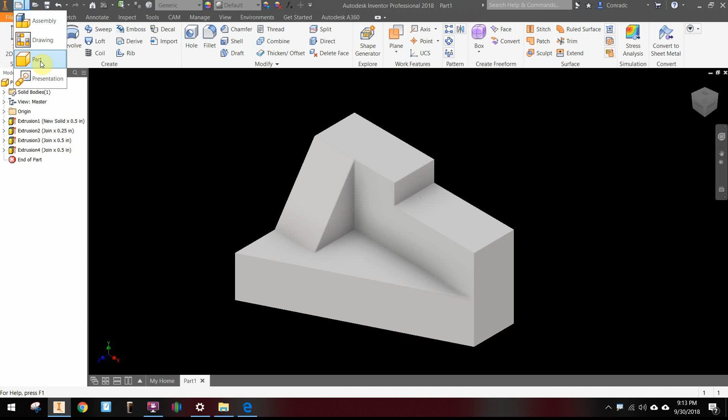The second widget also has a 1/4 inch grid, and I'm going to build that with subtractive modeling. Additive modeling would probably be a few more steps, so subtractive modeling would be a little bit more efficient. So we'll start a new part, start a sketch on the front face.

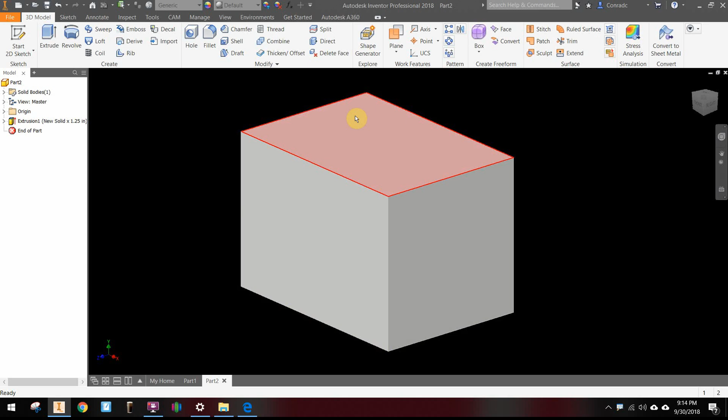1.75 inches by 1.25 inches. Go ahead and extrude that, a depth of 1 1/4. So with subtractive modeling, I'm starting with the entire block, the full size. So that's why I'm 5 units high, 7 units wide, and 5 units deep. And then now what I need to do is cut away and leave that L shape.

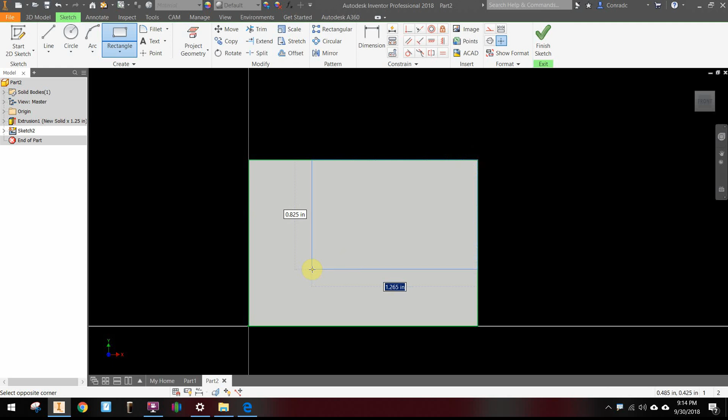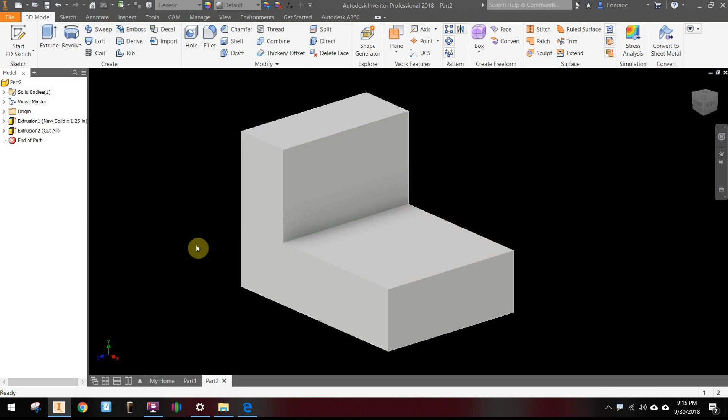So we'll put a new sketch on the front face. Project my geometry. Draw a rectangle. And then each leg of the L shape is going to be 1/2 inch. Do a cut extrusion, and anytime you're cutting all, you should always cut all instead of a specific distance. Next, and that was very easy to get fully constrained,

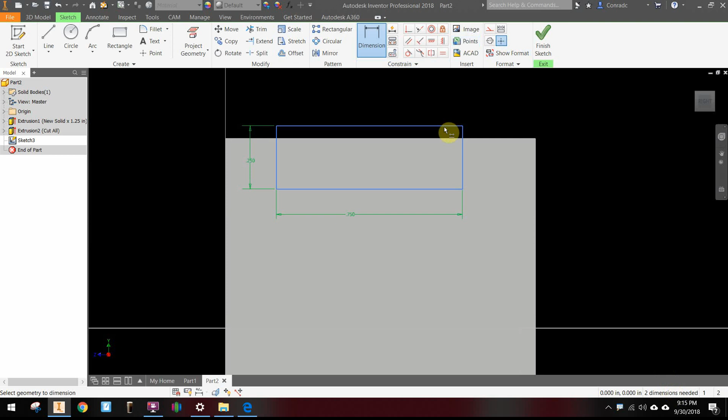I need to cut the slots. Of course, that's 1/4 inch high and 0.75 wide. And you'll notice I got a couple problems here. It says 2 dimensions needed. For one, I missed getting it on the line. So I'm going to come up here and there's a collinear constraint. I'm going to move that down on the line.

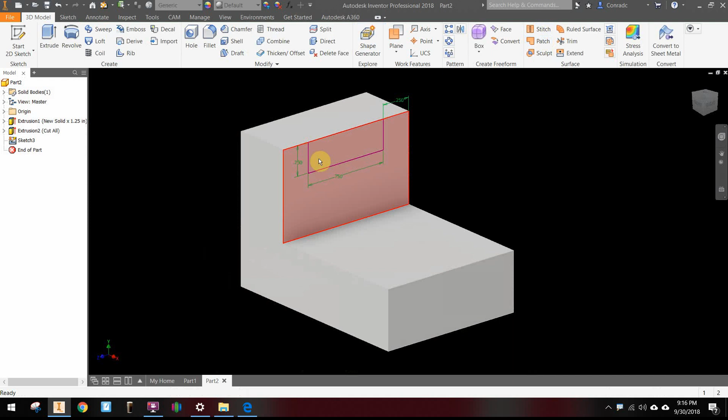And it still says 1 dimension needed. Of course, I did not dimension from the sides. So that slot is 1/4 inch from the sides. Go ahead and cut all. And then I'll do another sketch for another slot.

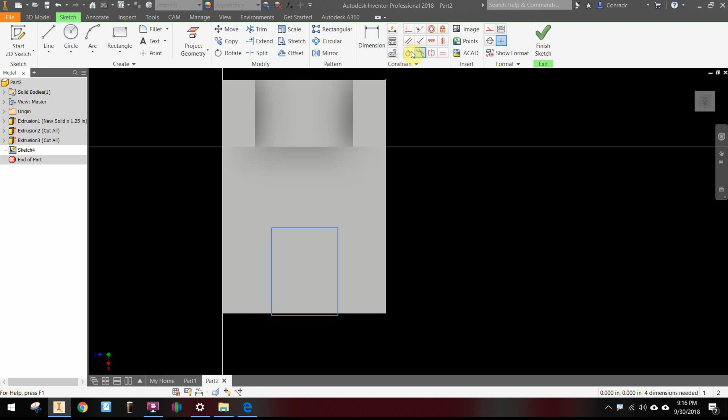And I'm not getting on the line there. I must have a constraint turned off. So I'll use collinear to make sure I'm on the line again. I'll dimension the width of 1/4, the depth of 3/4, and then it still says 1 dimension needed. We need to make sure that gets centered up.

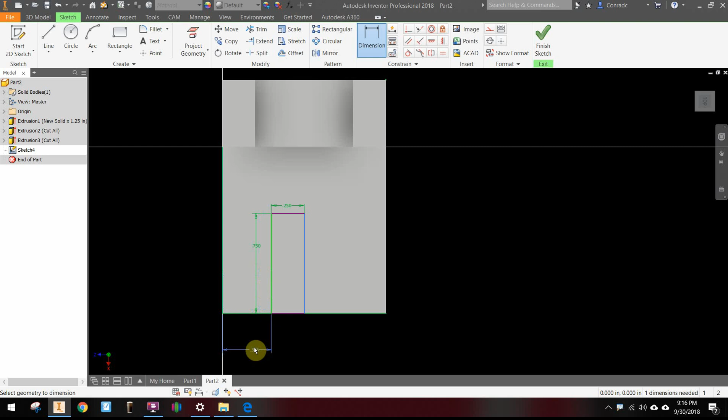So the dimension of the 2 sides would be 1/2 inch. So that centers up that slot. And go ahead and do a cut extrusion. Okay, so that's the second widget done all with subtractive modeling.

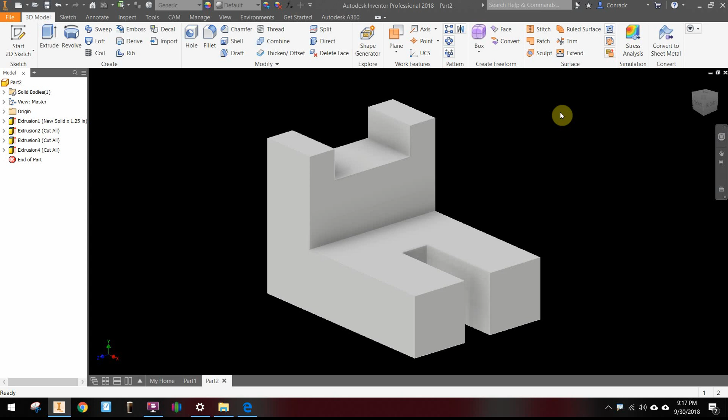Oftentimes it's simpler to do a combination of additive and subtractive modeling. It just depends upon the part. And as many different people build this part, you could build it in a lot of different ways and still end up with the correct size and dimensions. What's important is to try to be as efficient as possible.